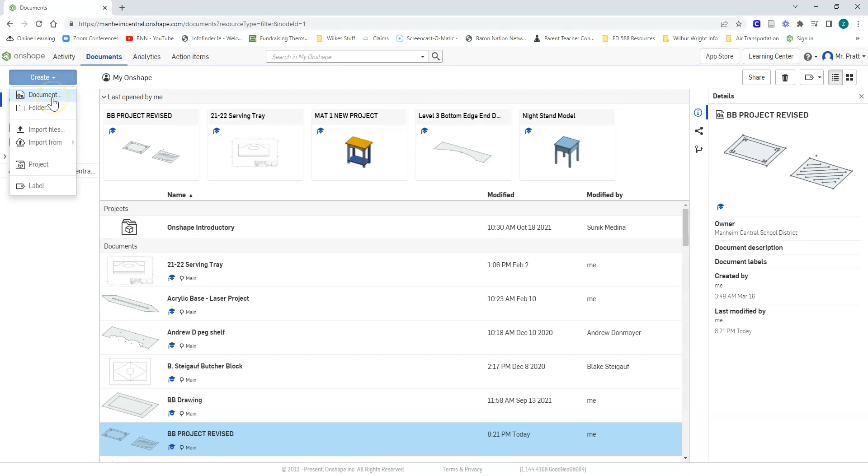To get started today, we're going to click on create, and we're going to be creating a document. When you create a document, make sure to include your name in there somehow. I always like to use my last name and the project I'm working on. In this case, it's Butcher Block or BB, and I'm going to call this Drawing.

You'll open up a new workspace. This is going to be our starting point for actually creating our drawing. If you remember from all the demonstrations and practices we've done in class, we're going to be drawing in the top view for the majority of the work that we do here in this class.

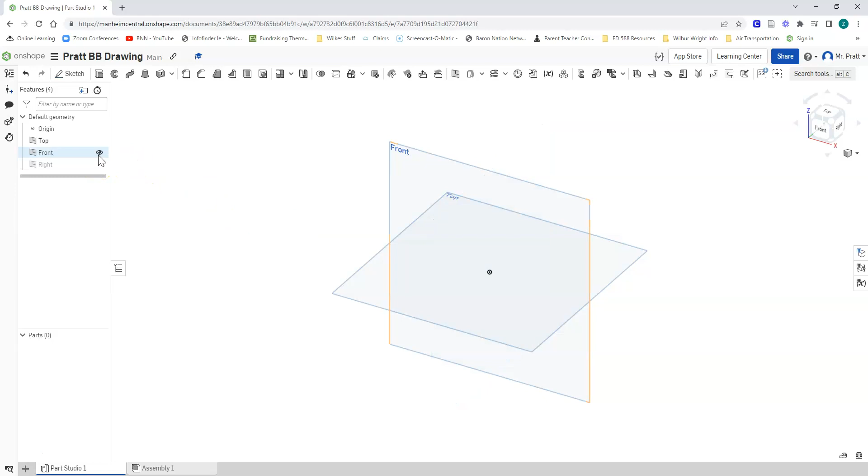So we're going to go ahead and hide the front and the right planes simply by clicking on the little eyeball next to those planes over on the left side of your screen. If you left click on the eyeball, it makes those invisible, hides it from your view. So the only view that we need available to us is going to be the top view.

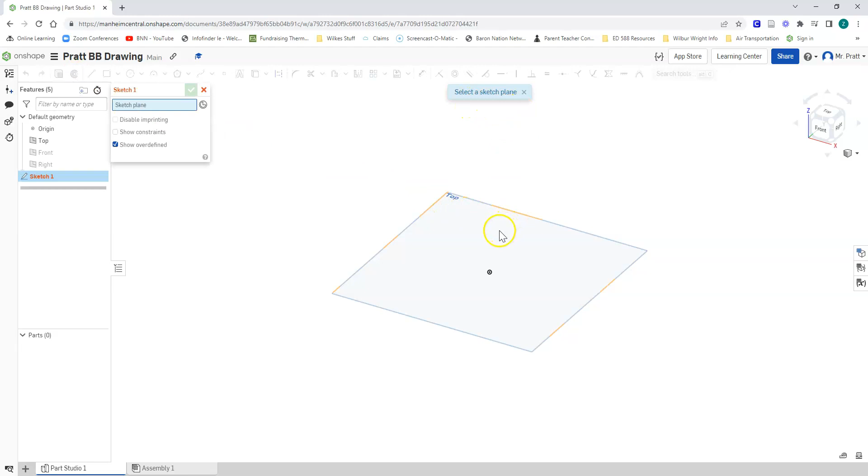So we'll go ahead and click Sketch to start a sketch. It's going to ask you to select a sketch plane. In this case, we're going to select the top plane. And I always like to show that I'm drawing only on the top plane.

So right now I'm in the isometric view, which gives me that 3D view. If we click on the top of our cube over on the right side of our screen, we can change that so we're looking directly at the top view of our drawing.

So what we need to do to get started is draw the outside of our butcher block project. The size requirement I'm giving you is 13 inches long by 10 inches wide. So we're going to use the rectangle tool up at the top here to get started by drawing that rectangle.

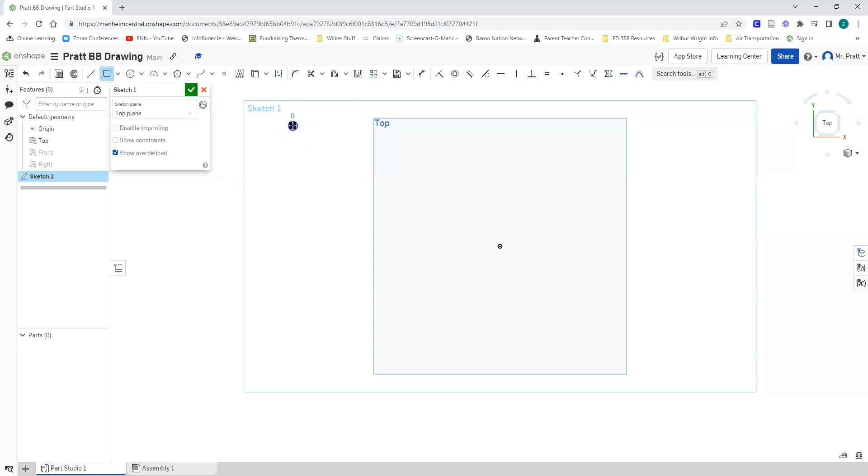If you left click and drag, you'll be able to draw out a box. It doesn't have to be the exact size of our project because we're going to go ahead and dimension that. Make sure you do not left click on the number, all you have to do is simply type in the number. In this case, it's highlighting our length here.

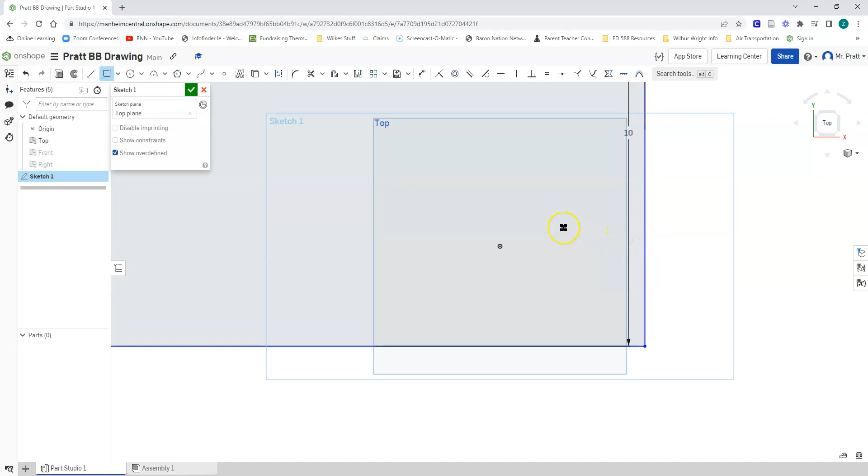We're going to type in 13 and hit enter. And then we're also going to type in 10 because that's showing our width is highlighted. Type that in, hit enter as well, and that gives us our 10 by 13 butcher block project.

So the first thing we're going to do from here is offset this outside box 1.5 inches to mark out where our feet are going to get drilled. This is going to be very helpful when we start talking about the drill press.

So I'm still using the rectangle tool right now, so I want to go ahead and unclick that or hit escape so it's no longer highlighted. And the tool we're going to be looking at is the offset tool. Kind of looks like a thumbs up.

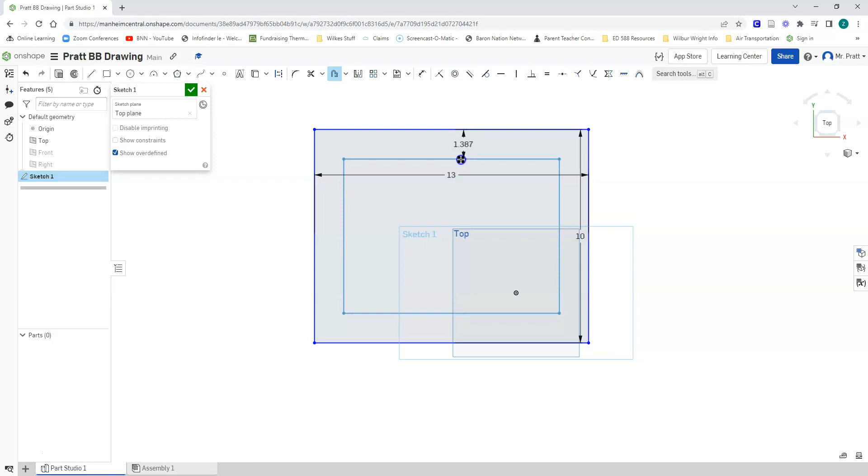So I'm going to go ahead and click on that icon there, and I'm going to click on one side of my rectangle. It doesn't matter which side, but I'm going to hold that click in and drag, and you'll see that all 4 sides of my rectangle can be offset at the same time. So I'm just going to go ahead and drag that in and let go.

So I have all 4 sides of my rectangle offset in, and we're going to make sure to change this number from whatever it currently is on your screen to 1.5.

And so each corner here of this rectangle is going to be the center point for where we're going to drill a hole for the feet that we're going to place on the bottom of our butcher block project. Now, to resemble what is going to look like a foot, we're going to put a circle here to identify that that's going to be the foot.

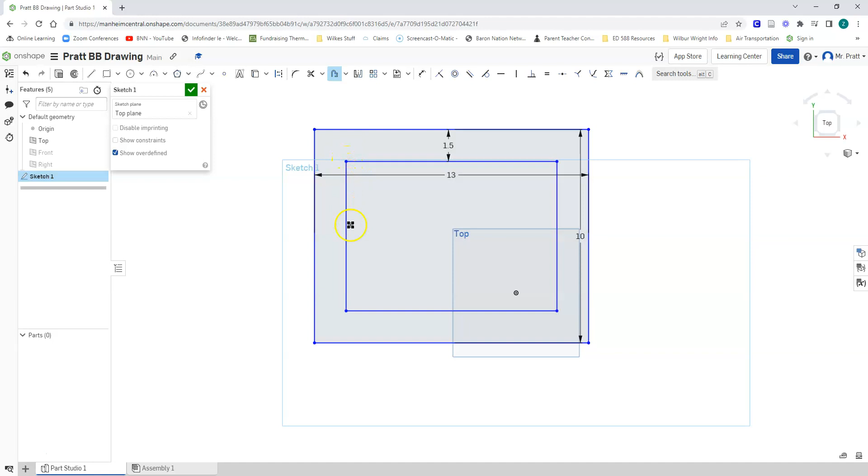And then we're going to delete some of the extra lines here to just keep things organized for us. So to do that, we're going to unclick our offset button because we don't need that anymore.

I'm going to click on the circle button or circle icon. There's a lot of different types of circles to choose from. We want to make sure that center point circle is highlighted, and that's the default option on your screen.

If you go to any corner of that offset box we just created, click on the point there. Remember, that's the center point of your circle, and you can go ahead and draw a circle and left click. Then we'll identify the diameter, which we know is going to be 0.5.

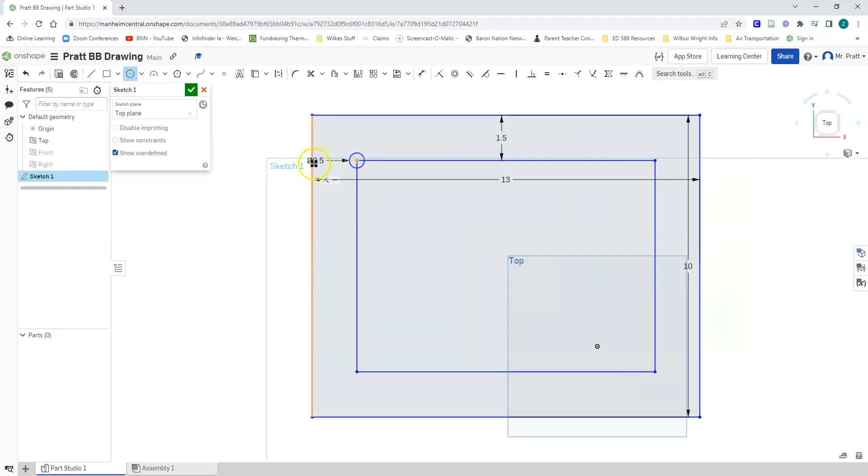How we know this is asking for the diameter is if you look at the symbol in front of the number. It looks like a circle with a line through it—that's the symbol for diameter. So we'll type in 0.5 and hit enter, and it'll change that over to a half inch circle with a diameter of 0.5. It labels that for us, and we know it says diameter.

Next, we'll do that to all the other corners, repeating the same step, so we see a circle at every corner we just created using that offset tool for that box.

If you make a mistake and accidentally type in the wrong number, you can always go back and redimension that. If I unclick my circle icon, I can use the dimension tool to change that dimension, or simply click on the dimension and type in that number and hit enter, and it'll change that for me.

So I'm good, I don't need to do that—I'm just going to keep what I have. But now I want to delete these lines here. Anytime we're creating a drawing in this class, we want to keep our drawings as organized and clean as possible, so we're going to use what's called the trim tool.

It looks like a pair of scissors. We click on that icon and select what lines we want to cut or erase from our drawing. In this case, we don't need this rectangle or this edge of it—we only need the corners and the circle we just drew. You can see how it creates a line segment in between any objects that would intersect.

This is where our feet will be drawn on or drilled out using the drill press later in this project. So there I have my first step of my project created—this is going to be the template we'll print out later.

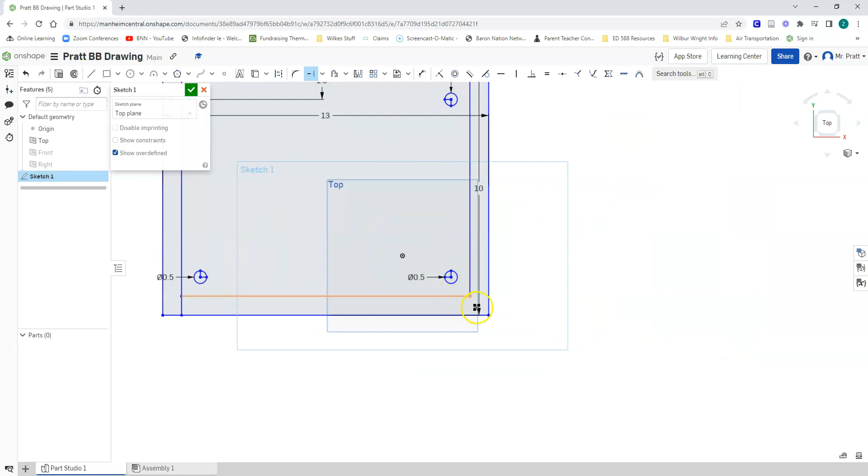And I'm going to do that on both sides here. Same thing.

Now what I can do is go ahead and draw some type of detail along this edge. You could use a lot of different tools. You could use the fillet tool, which is very simple. You could also use the spline tool, which I know a lot of students like to use.

You can use this by simply clicking on a point, making another point, maybe I want it in here, clicking again, and as you can see, as I draw this line, it's not going to be a straight line, it's actually going to start to have some type of radius or curve to it. That's another option. You could do this around the entire edge of the board too. You can go crazy with that.

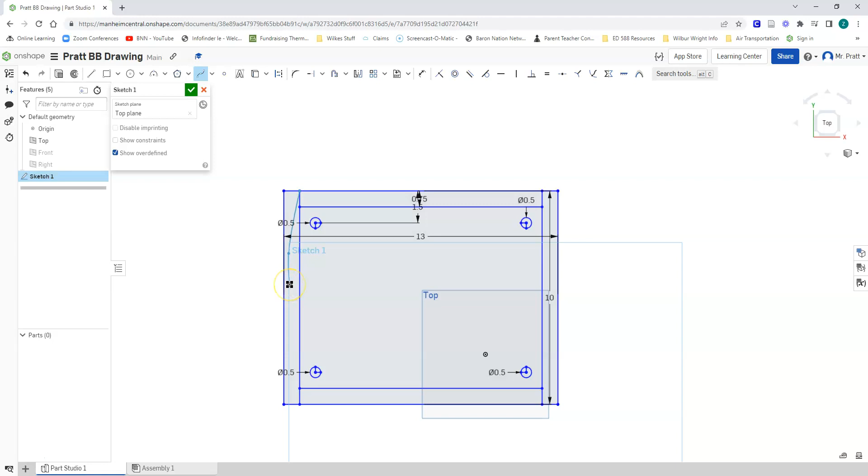However, what I want is just a simple curve. So let me delete that. To draw my curve, I'm going to use the 3-point arc.

Now, because it's asking for 3 points, what I need to do is find the center point for this side here so I can identify those 3 points of my arc. I know that this overall width is 10 inches, so I'm going to offset this one more time, 5 inches in.

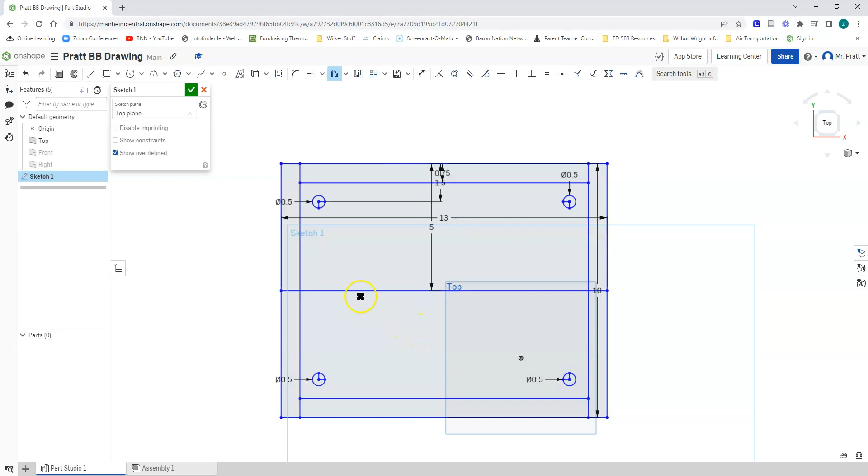That's going to give me my center point for my arc here, which I can then go ahead and draw in. Here's my first point, here's my second point, and my third point would be that center, and that is what I'm going to use there. So all I need to do is left click, and that's going to give me the drawing or design I want for my butcher block project.

Yours might be different. Now again, as we talked about, we want a clean drawing, right? And this is very messy right now. So we're going to go ahead and finish up drawing the other side as well, and then go back and trim and delete any lines before we move on any further.

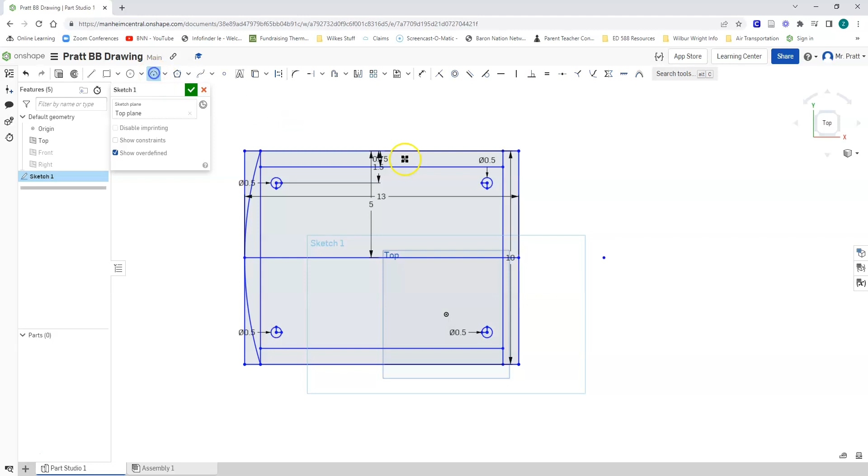So what I'm going to do again is click on that center point or 3-point arc, click on my top, click on my bottom, and find the center here and hit enter, and that's going to lock that in as well. Now that's ready to go, so I can go ahead and close out of my 3-point arc or hit escape and trim anything that I don't need.

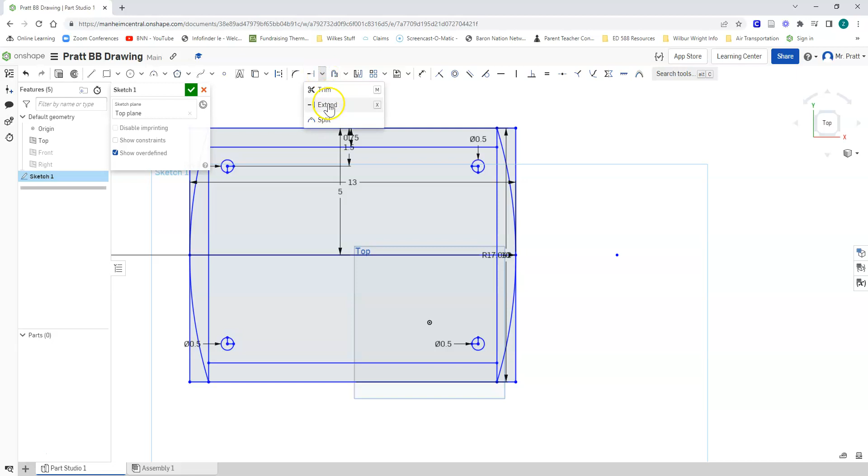Now at this point, the scissors are gone. It's actually going to be found in the drop down. You might have to look for it a little bit. And again, I just want to get rid of this outside edge on my ends here.

So I don't want to necessarily delete anything inside. I just want to delete this outside edge on both left and right side. So I'm going to delete those lines.

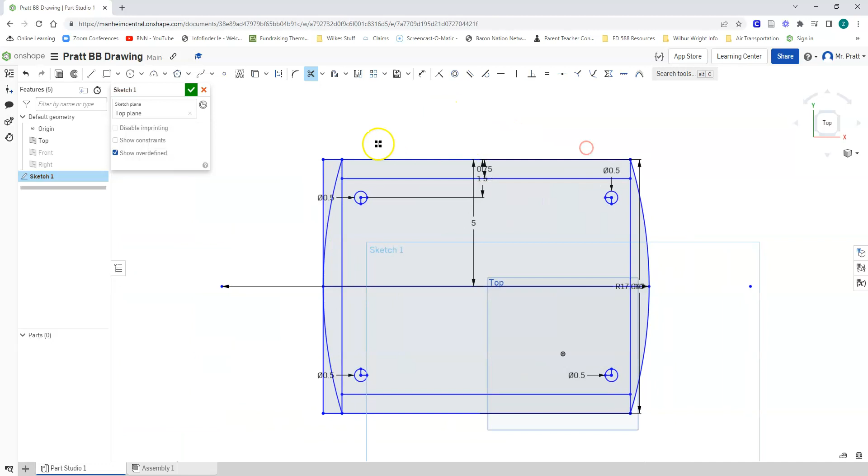You might find there's some red marks on your project. That's from over-dimensioning. If that happens to you, hit escape or undo. Most of the time you just repeated something you shouldn't have repeated.

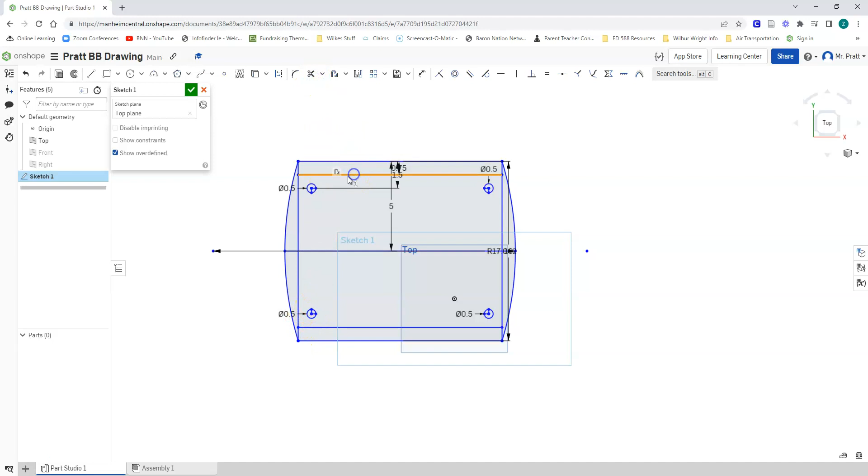Okay, so I have everything I need as far as the outside edge of my project. I have my points here. I can go ahead and delete these other lines that I have on my project that I don't need either. Just select those and you can hit delete and they will go away.

And so there's what I want for the outside edge of my project. Now I could do some of the other things here. I could round this over a little bit more, but I decided for this project that this is what I wanted.

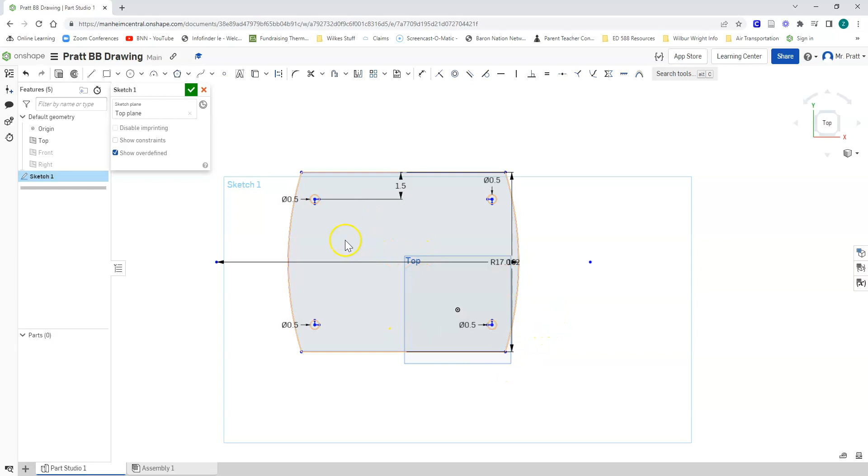Again, completely up to you as far as what your outside edge might look like, but this at least gives you a chance to kind of experiment and play around with the different tools in the program and to figure out what you want your project to look like as you move forward.